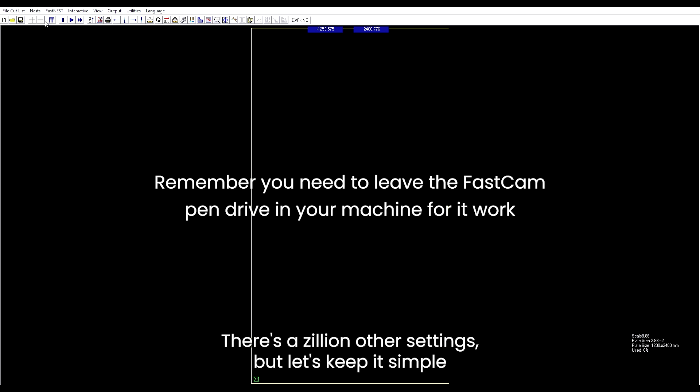Let's go plus, and I have everything saved on my pen drive so I can move it to my CNC easily. So if I pick something out of here, I'm going to do something with my logo on it so it looks cool. These are all saved in DXF.

So what it's doing is bringing that DXF file into the nesting software. It shows you a picture here of what you're bringing in. So we select that, and it'll jump into the part data.

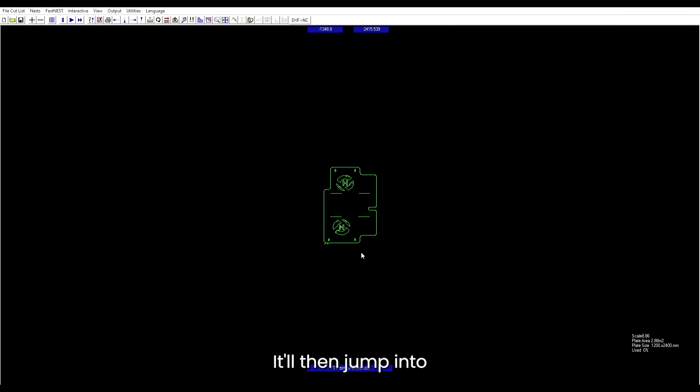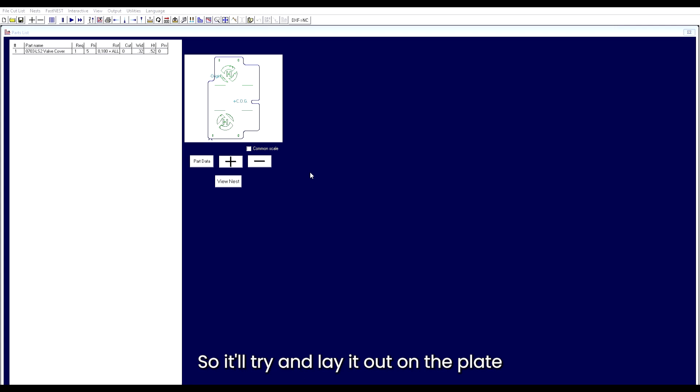Here you can select how many you want, so we want 3 of those. Priority means it'll try and lay it out on the plate being the most economical it can. If you give that a priority of 1 and then bring other parts in with a priority of say 9, it'll nest these parts first in the most economical form.

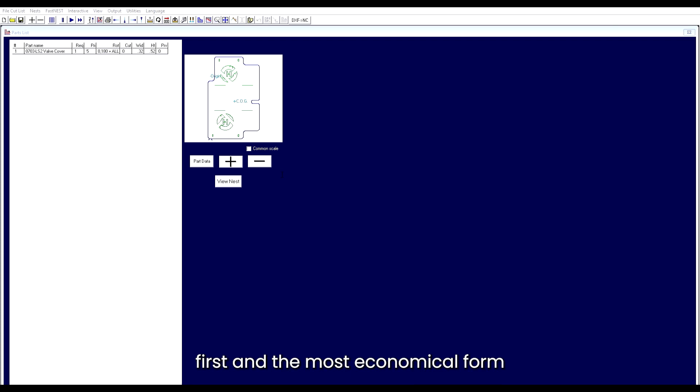This is for manipulating it, so you can turn it, flick it, flip it, all the rest of it. I just always leave that on there, then it doesn't try to do anything too crazy to it. It will allow it to have a part flip.

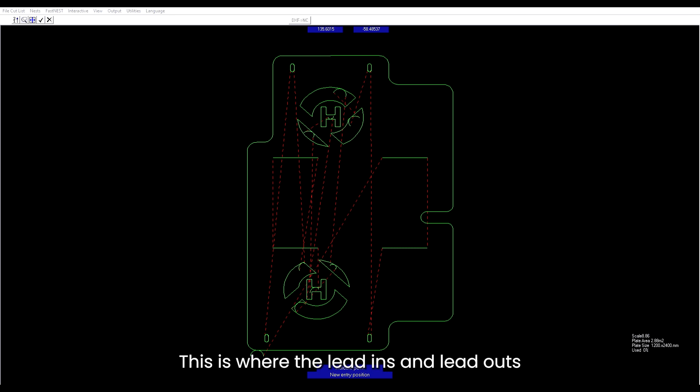Move entries, you can do this now or on the output process, but this is where the lead-ins and lead-outs are. For example, if you look at this lead-in here, it's got a nice lead-in but there's no lead-out, so we'll just zoom in a wee bit by scrolling your mouse.

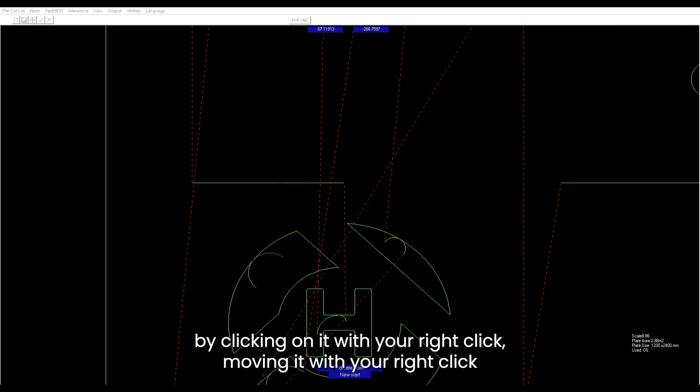Click on where you want to start and end, and you can change the shape of this by right-clicking on it, moving it with your right click, and then when you're happy with it, you left click, which turns it back to green.

It takes a wee bit of getting used to, and took me a long time to work that out. So the left click is the key. Right click, left click.

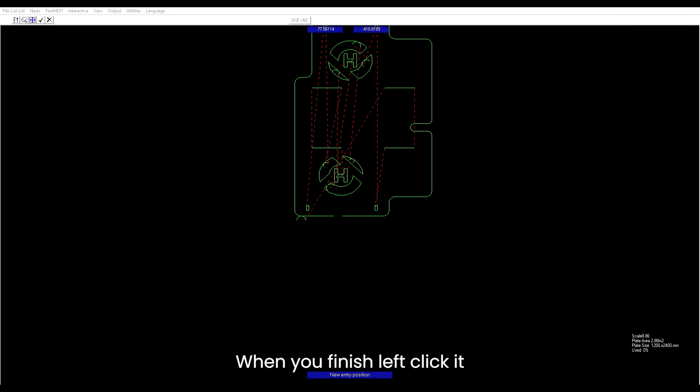So you go through all that, making sure where you want to go in and out, start and finish. When you finish, left click it, click the tick, and it'll load it onto the plate.

From there we can move it around, so say we want to cut it this way, you can move it over with the arrows, drop it down as low as it'll go, bring it over, you can rotate it, you can flip it on the Y and X axis by going to interactive.

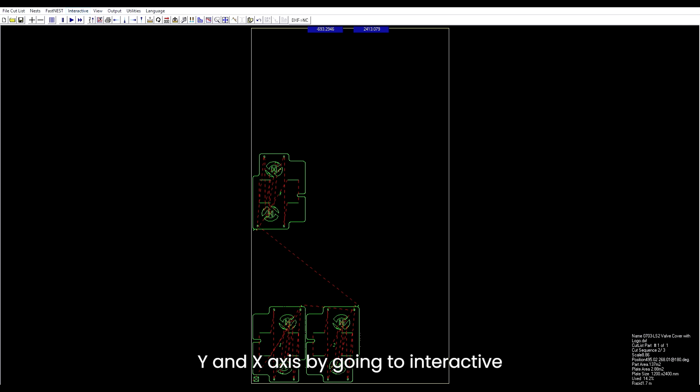So say you want to flick it on the left, from left to right, so that's X, and it just turned it over. So you can play with that.

It will try and work out what's the most economical way, but if you're like me and you're pretty tight on how you use your plate, then I like to play with it myself and manipulate it around to get the best and most economical use.

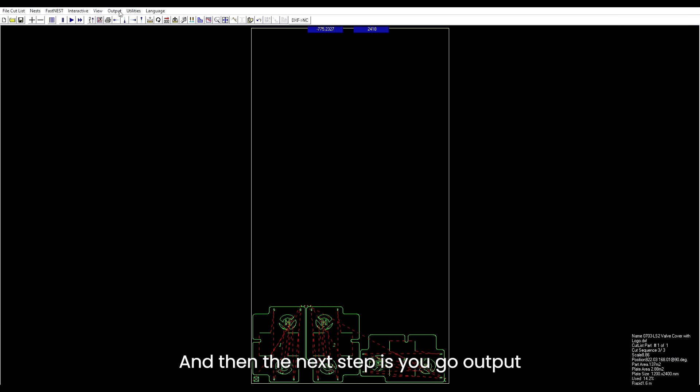So that's loaded onto your plate, and then the next step is you go to output. So generate output, you give it a file name, so we'll just call this cover.

You can load all this up to save it for future use, but if you're saving it straight onto a pen drive, then I don't worry about any of that. Keep it simple.

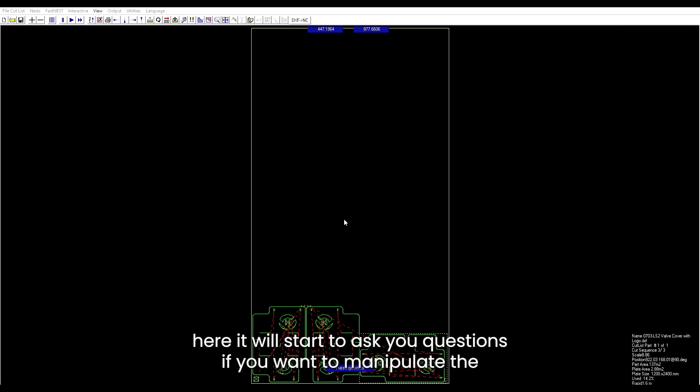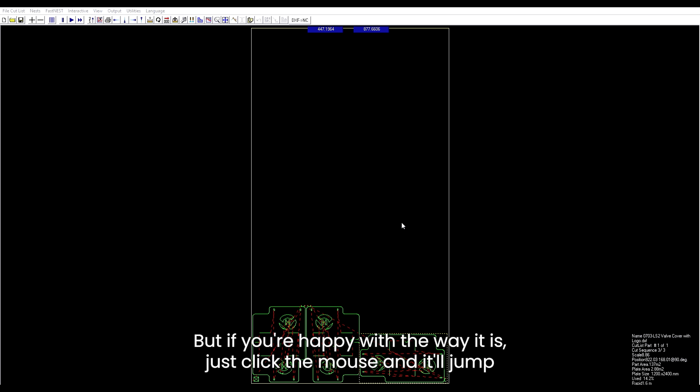Here it will start to ask you questions if you want to manipulate the cutting line any further, so you can choose which one you want cut first, but if you're happy with the way it is, just click the mouse and it'll jump to plot nests.

We don't need to do that. And move entry positions, that's going back to moving the stop and start entry points. We don't need to do that.

Then it'll ask you where you want to save that to, so we save it onto the pen drive, put back into here on my log splitter, and we'll just save it there, and it is saved.

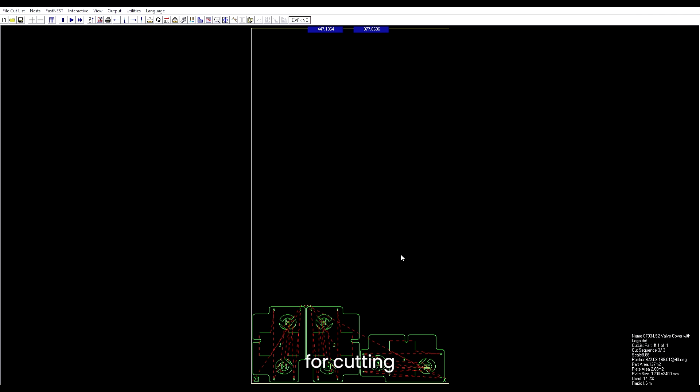If you click yes on there, it'll show you what it's going to look like for cutting. And you see over on the right here, all we've done is turned the DXF file into a TXT file, which is just numbers and letters.

So it's telling the CNC where to go, it's just coding in the most basic form. If you open one of those in Microsoft, it opens in Notepad. That's how basic it is.

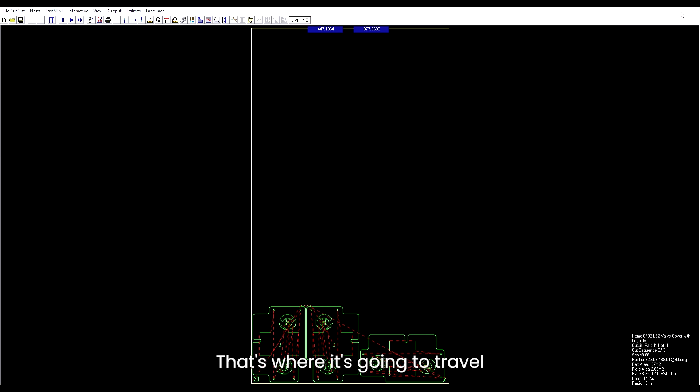So you've got your text code there, that's where it's going to cut, that's the way it's going to travel. That's all done, it's on your pen drive.

Click out of there, so you take your pen drive out and now load that into the machine, which we'll do now.

Okay, so we've saved our DXF file to TXT on the pen drive. We'll now load it into the machine by simply plugging the pen drive into the control panel and selecting U disk.

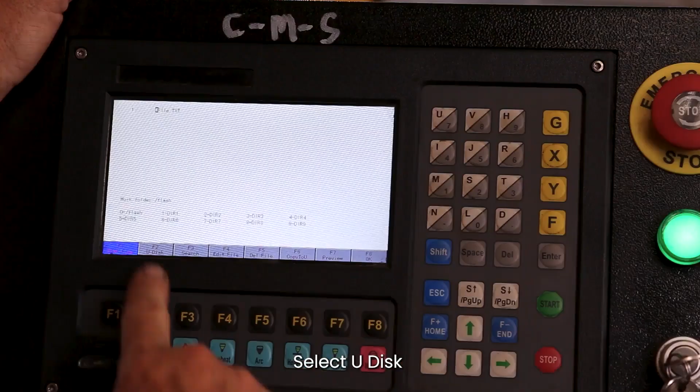Which will bring up all the files on that pen drive. You can see all my different items I have coded out. So I'll go down into the log splitter, my Mark II design.

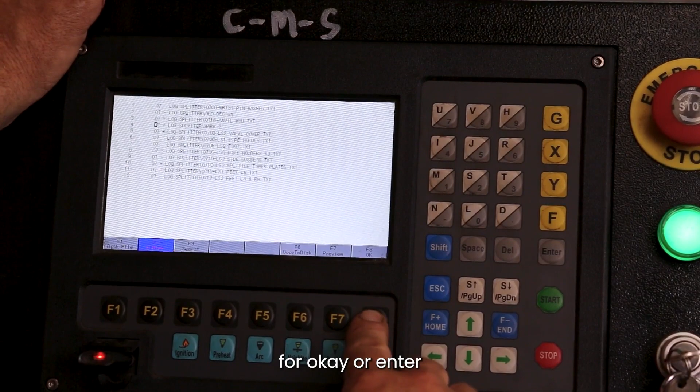So I'm just scrolling with the keys and pressing F8 for OK or enter. I'll go with the one that I've got all the lead-ins and lead-outs done properly, so that's that one there, so I know that's the file I want.

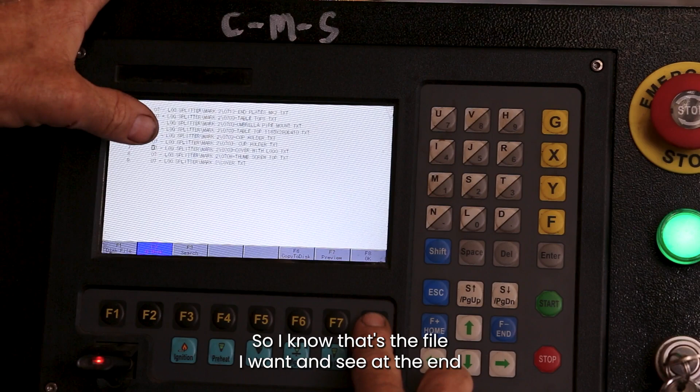You can see at the end it's saying TXT file. It won't read any other kind.

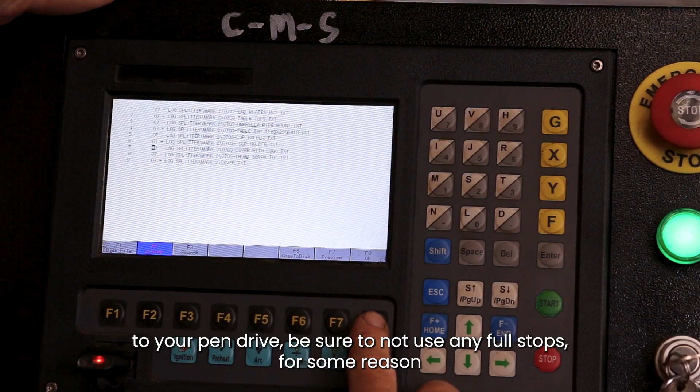Oh, one other thing I forgot to say before is that when you save it to your pen drive, be sure not to use any full stops. For some reason it won't read full stops and it won't save the information.

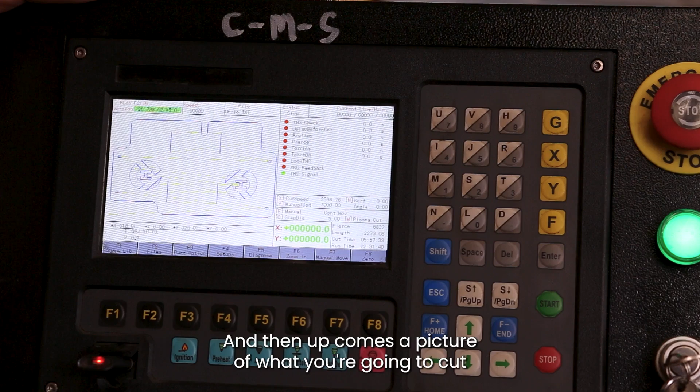So you click on that, OK, and then up comes the picture of what you're going to cut, showing you the cutting lines there. Yellow is obviously when it's not cutting, and blue is when it's cutting. And then it's got all the setup procedure that you then go through to cut that efficiently.